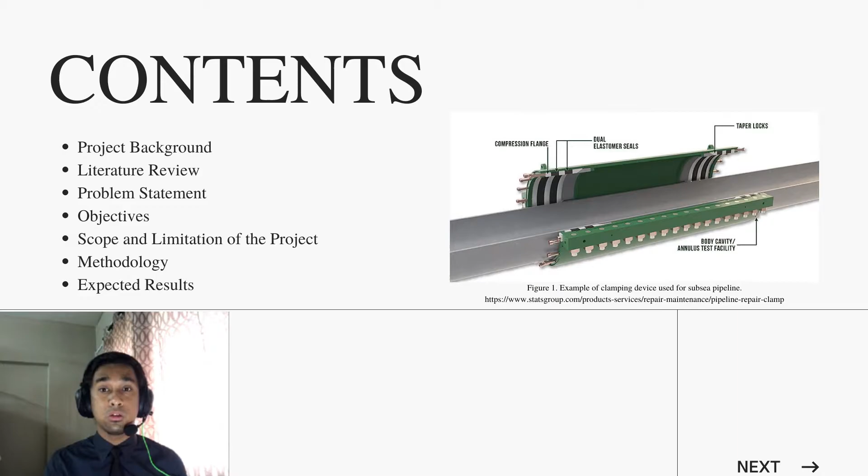The title for this project is Structural Integrity of Clamping Device for Workover Riser System. Our main focus is on the clamping device itself. What is a clamping device? A clamping device is basically a device used for repair purpose on subsea pipelines. It is typically used to encase the damaged region of a pipe. It covers the damaged part from being exposed and prevents further damage.

A clamping device is basically a metallic-based device consisting of two-piece flange shells with oversized annuli that fit over the pipe, with perimeter elastomeric seals for fluid containment. The flanges are bolted together so that the clamps are fixed together. Seals are one of the most important parts of the clamping device. A seal is used to prevent leakage, to seal the liquid from leaking.

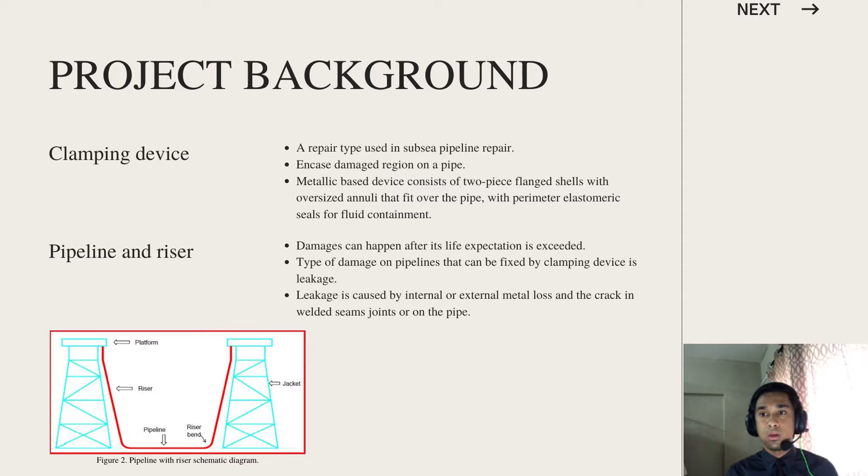What about pipeline and riser? Subsea pipelines are connected to a riser as can be seen in figure 2. Damages can happen on the pipelines or risers after their life expectation is exceeded or due to environmental factors such as corrosion. There are many types of damages that can occur to pipelines and risers. One of the damages that can be fixed by using a clamping device is leakage. Leakage can be caused by internal or external metal loss, and sometimes due to cracks in welded seam joints or on the pipe.

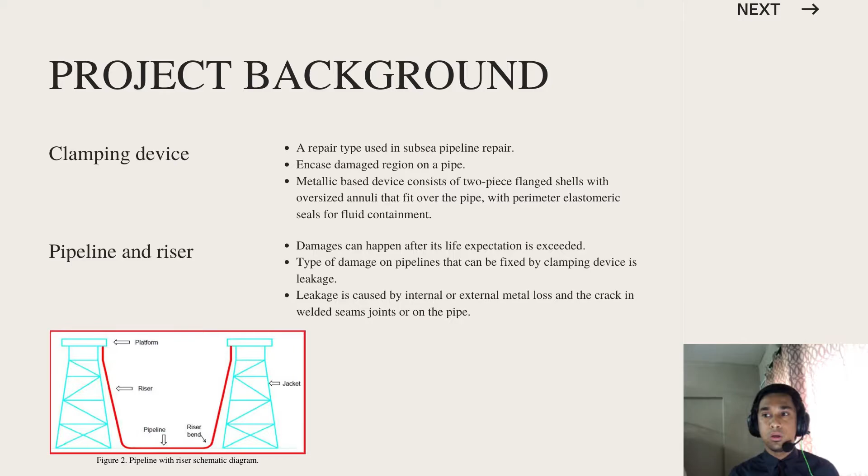Based on findings from the literature review, there are many types of damages that can occur to pipelines, which include gouging, denting, and corrosion. Corrosion is one of the most common damages. It is the main factor that causes failure in liquid pipelines and one of the top 3 factors for gas pipeline failure. Based on findings, loads acting upon pipes can change due to several factors such as leak tightness of pipe, aging of pipe, low quality of materials, and poor pipe installation.

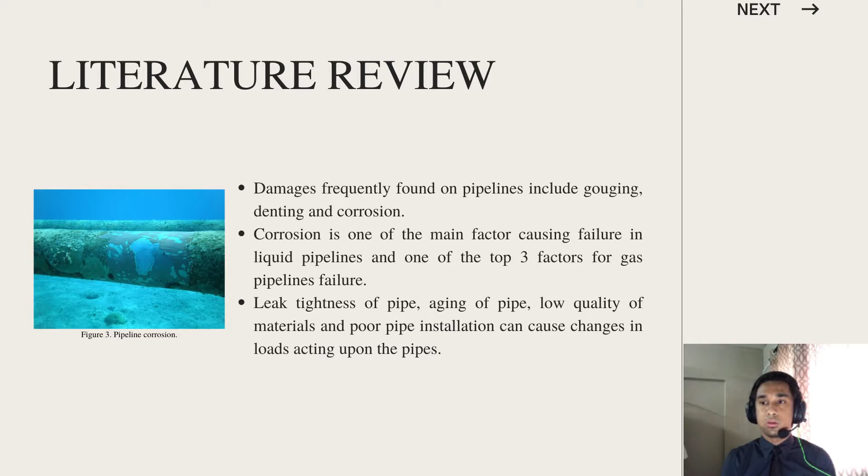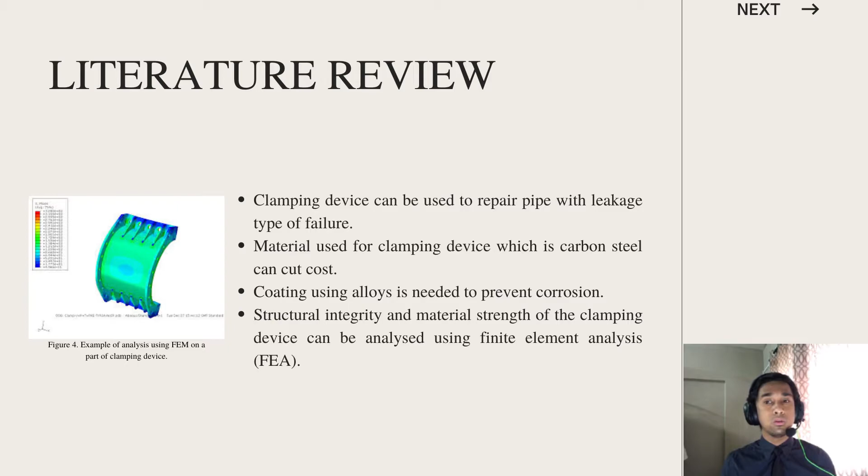As mentioned earlier, a clamping device can be used to repair pipe leakage. Using carbon steel as material for the clamping device is a great idea as it can cut costs. But there is one drawback: carbon steel has low resistance towards corrosion. But this problem can be solved. Corrosion can be prevented by coating the carbon steel base with alloys which have higher corrosion resistance. Based on the findings, structural integrity and material strength of the clamping device can be analyzed using finite element analysis.

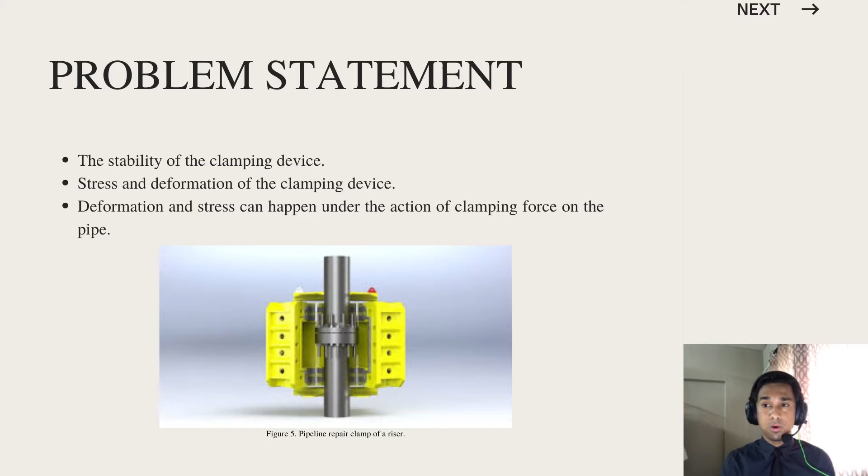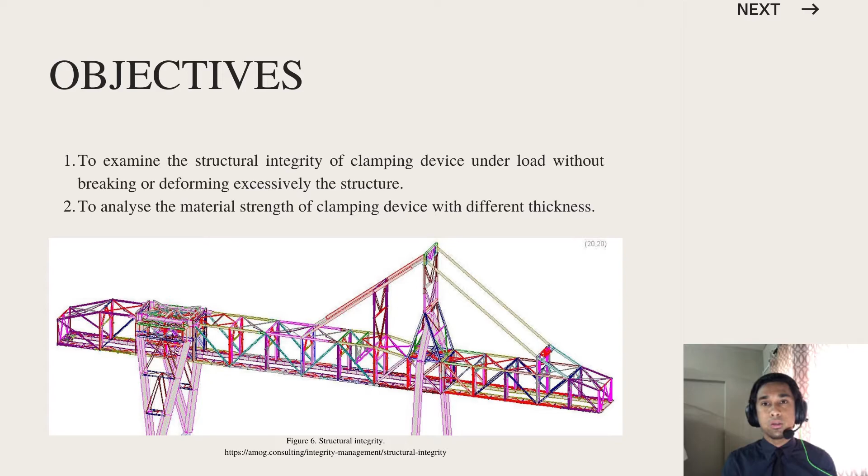There are a few problems in this project. First, how stable is the clamping device? Second, how big is the stress and deformation of the clamping device due to force distribution from the pipe? Deformation and stress can occur due to the clamping force exerted on the pipe. The aim of this project is to examine the structural integrity of the clamping device under load without breaking or deforming the structure excessively. Second, the purpose of this project is to analyze the material strength of the clamping device with different thicknesses.

What are the scopes and limitations of the project? It has been decided to design the clamping device using a CAD software, CATIA. The drawing and dimensions of the clamping device are obtained from a client. The model designed in CATIA will then be imported into ANSYS using either a STEP file or IGS file for further analysis. Material to be applied for the clamping device is grade 70 carbon steel A516. The analysis will be done with 3 different thicknesses of clamping device, which are 48mm, the original thickness 50mm, and lastly 52mm. It is also considered that the force distributed from the pipe or the center of the design is uniform.

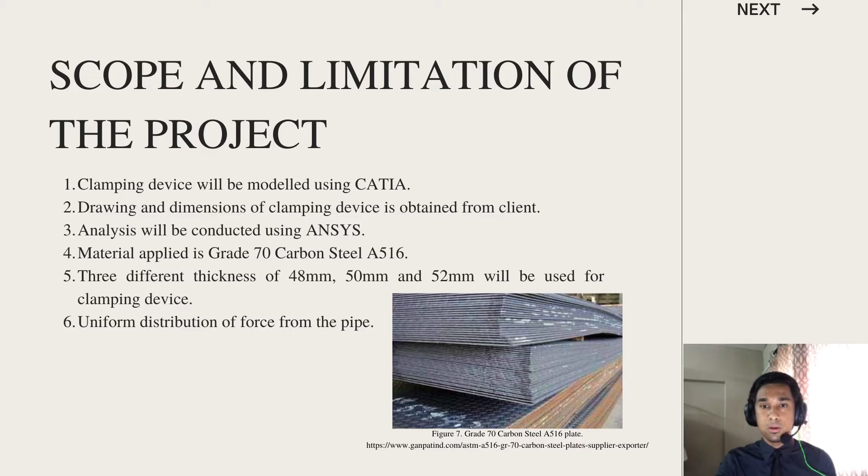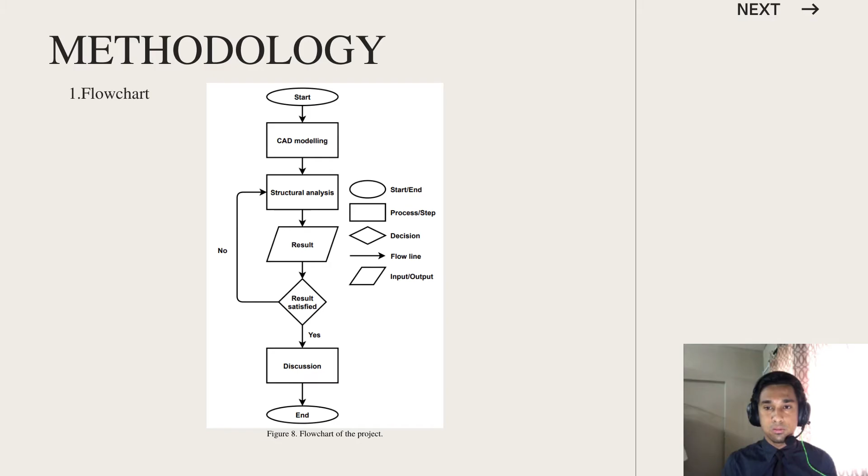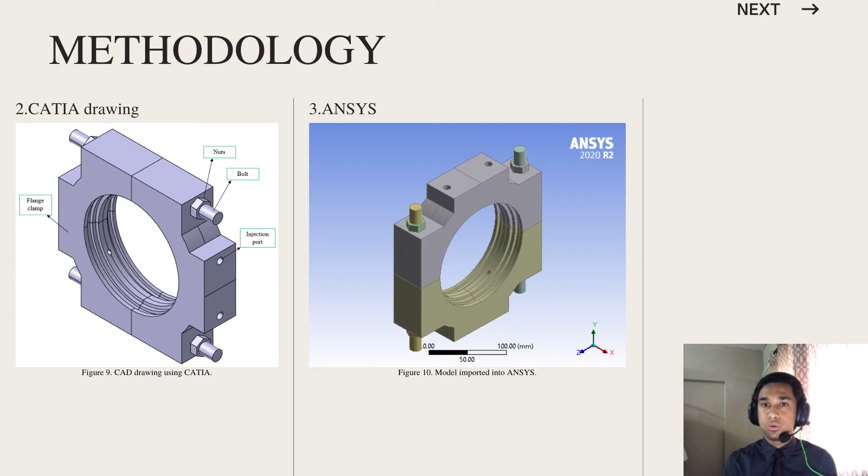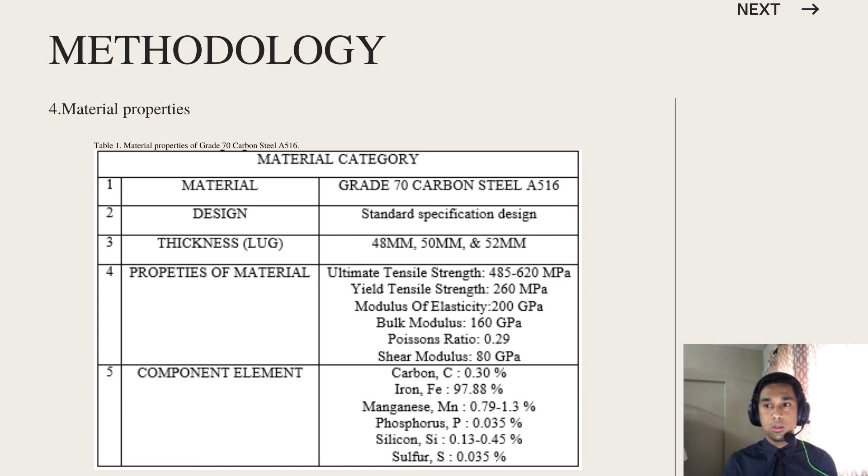Figure 9 shows the model of the clamping device designed and drawn using CATIA, while figure 10 shows the imported design in ANSYS. The material of the clamping device has been decided to be grade 70 carbon steel A516. As mentioned earlier, different thicknesses will be used: 48mm, 50mm, and 52mm. The material properties are as follows. The ultimate tensile strength of grade 70 carbon steel A516 is about 485 to 620 megapascal. The yield strength is 260 megapascal. Modulus of elasticity is 200 gigapascal. Poisson's ratio is 0.29 and shear modulus is 80 gigapascal.

The result that we expect out of this project is that we are able to identify the structural integrity and material strength of the clamping device under load without breaking or deforming the structure excessively. The clamping device should not break or deform due to the force distributed from the pipe. Second, the structural integrity and material strength of the clamping device with different thicknesses can be analyzed. Through these results, the best thickness can be suggested, either 48, 50 or 52mm. It can also be decided whether the material fits the application for damage repair on pipelines.